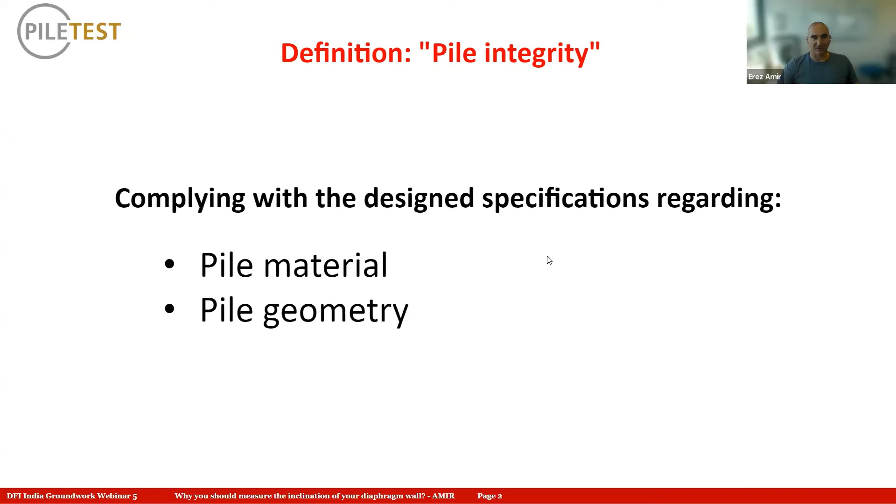Let's start with a broader definition of what pile integrity is. So in general, pile integrity is complying with the design specification regarding two things. One is the pile material, the other is the pile geometry. And if this sounds vague, I have examples for both. So when we're talking about material, we're talking about reduced concrete quality. It can be a void or a soil inclusion, mixed soil or slurry with concrete, or anything that reduces the concrete quality, as well as segregation, honeycombing, etc.

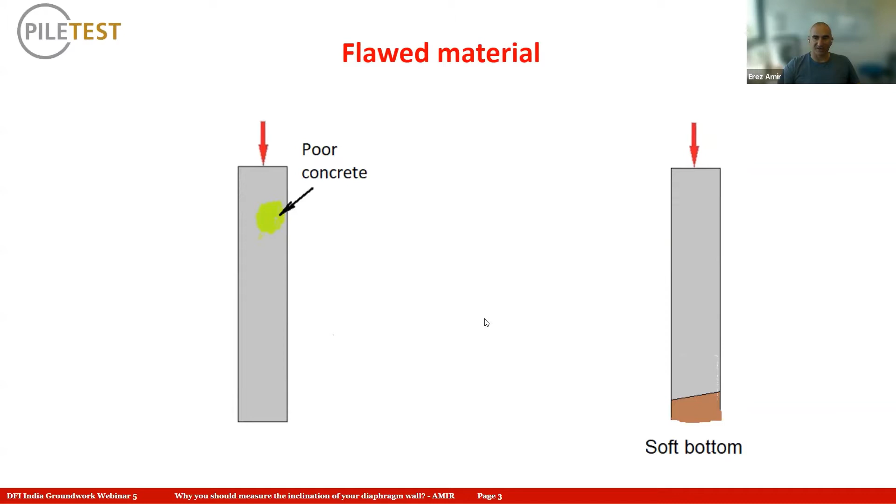Another example for that is a soft bottom, especially important when we talk about end-bearing piles. In this case, when you have a loose material in the bottom, of course, when the pile was not clean or a collapse happened just before pouring, that's a soft bottom and a flawed material at the bottom, which affects the design specification.

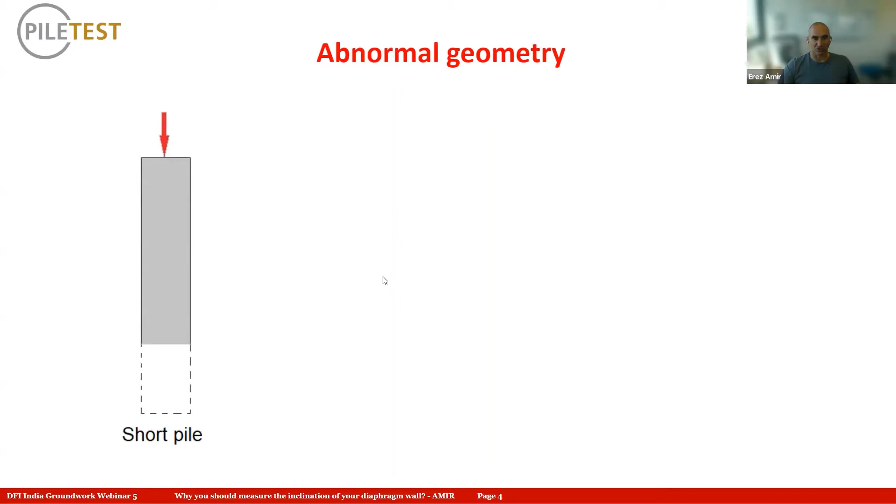An example for abnormal geometry is, of course, the most common and the first thing that you think about when you talk about pile integrity: a shorter pile. Another example is necking, and one that is not displayed is, of course, the opposite of that, bulging. Bulging can also be a severe problem when you have negative friction, which we're not going to get into right now. But necking is definitely a very common issue with piles.

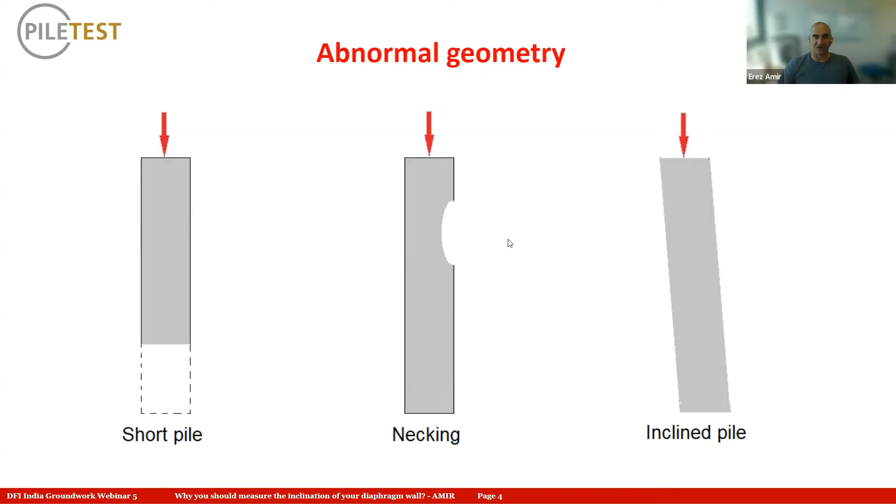And now we reach the subject of our presentation, which is inclined piles. Now, inclined piles are not intuitively considered a pile integrity issue, but let me show you in this presentation how much this perception is wrong. But first, let's start with some examples.

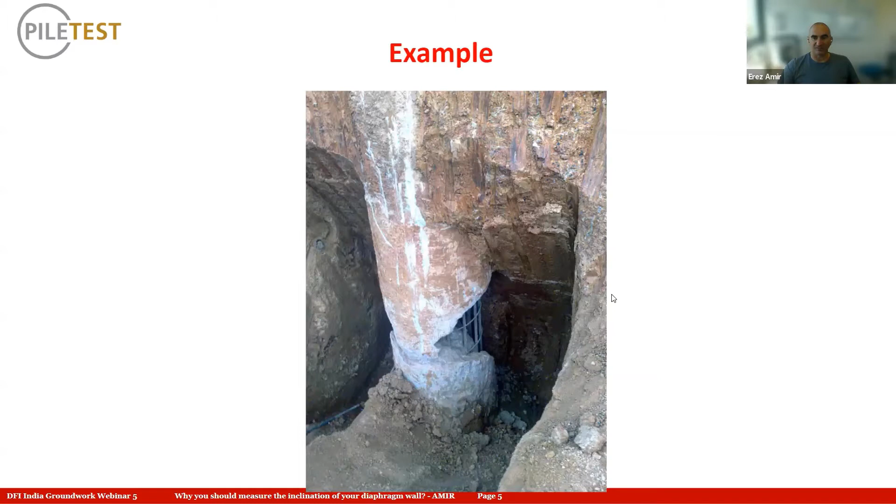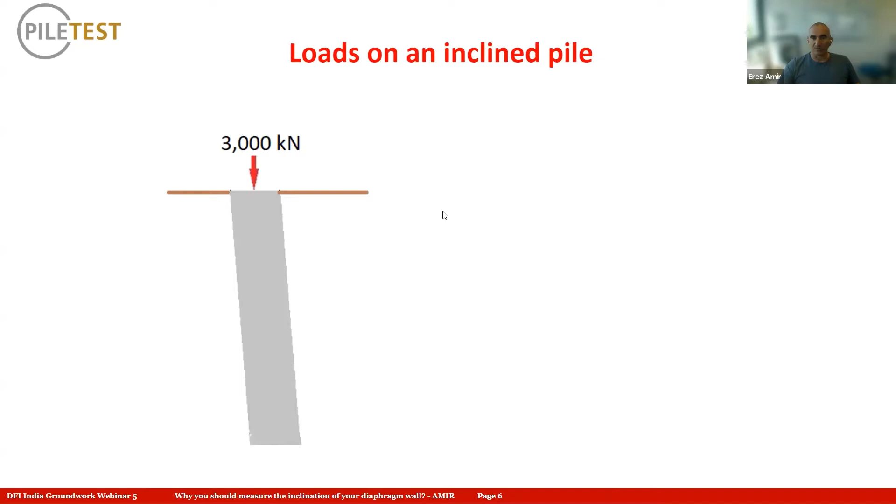Let's get to the subject of inclined piles. So we've run a finite element simulation on an inclined pile with a 3,000 kilonewton load. And we see here the load distribution, the bending moment distribution. And we can see that the top of the pile gets very high bending moments.

Very often this can be much more than what the concrete is designed for. And this is unexpected. I mean, this is never planned for. The design of the pile does not take that into consideration. All the design is being done on a totally vertical pile, and this kind of inclination can introduce totally unexpected forces and, of course, potential problems to the pile.

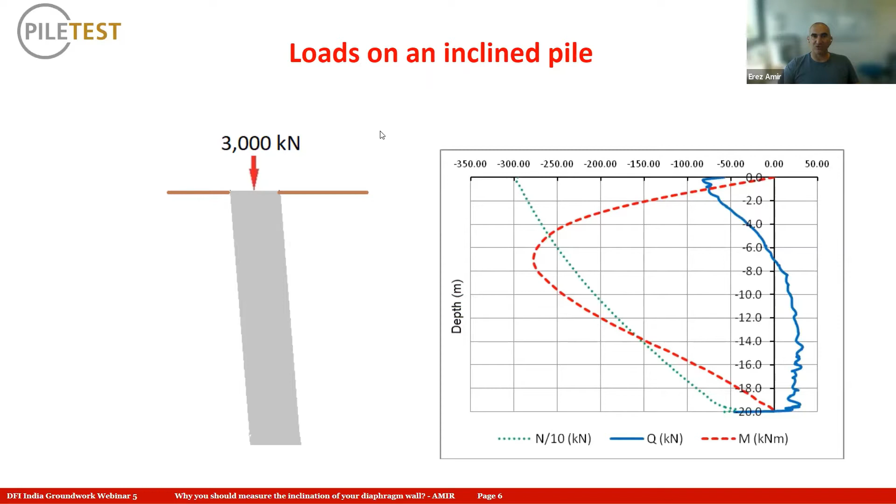So that's really one aspect of why inclination can cause severe, sometimes catastrophic issues in the pile, and it's definitely something that we should consider in our design. The other issue with inclined foundations, not just piles, but walls, is the design of the underground parking garage, which is very often the case in many buildings.

Now, there is a standard number of parkings that has to be offered in a specific building per size. It depends from place to place, but usually the design is not very generous on the parking. And if a specific number of parking slots is required, there will be very little or no spare parking spots available. Now, if the walls supporting the building are inclined inside, it is quite possible that some parking spaces will not be available. It can be that bad. Or it can change the parking from a moderate normal car to just a very small car.

This can cause a severe problem in dealing with the authorities regarding the permits of this building, because not all the designed parking spots for which the building got the permits will be available. In addition, it's a loss of sometimes very expensive area to the underground garage, as well as other problems. But that's not all.

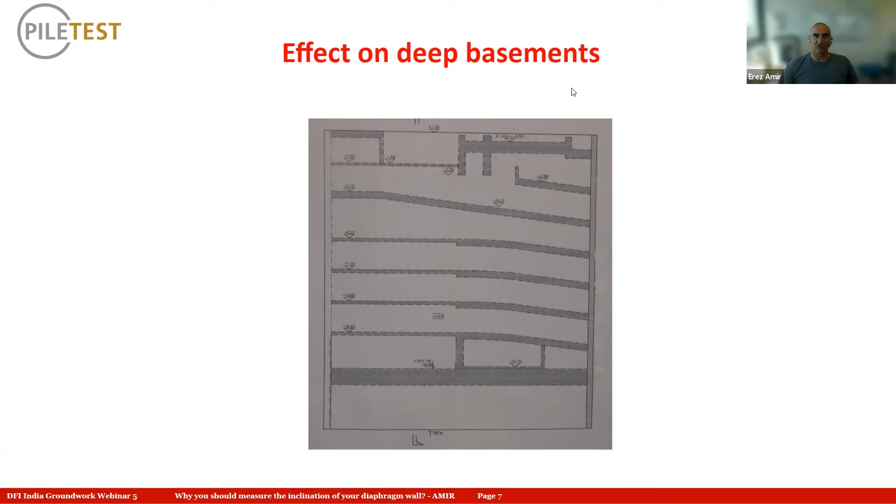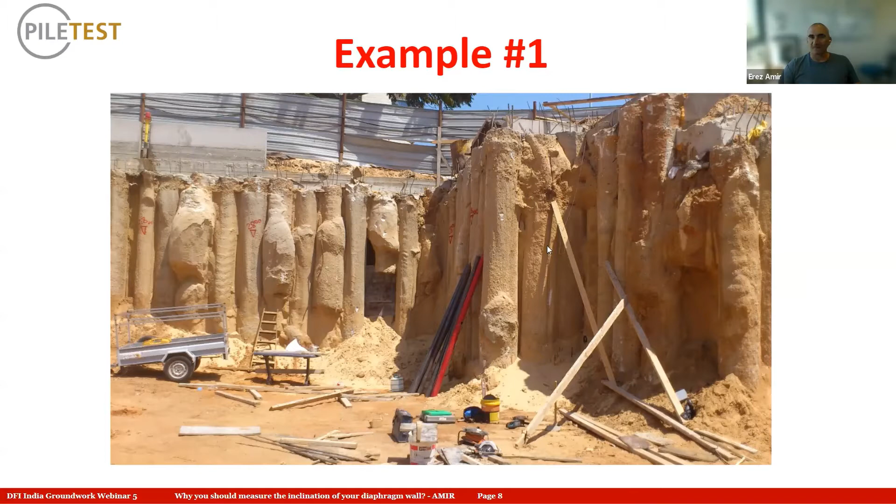Let's see some examples. This is maybe the most extreme problem that I could find with a retaining wall, and you can see that what you see on top is really not what you get when you actually excavate and look at the size of the pile. You can see that in this project, almost all piles are flawed in one way or another. It can be bulging, it can be inclination, it can be the joint between the piles, etc.

And here's another example of an underground garage with barrettes, with load carrying walls. And you can see that here and here and here, if you can follow the cursor, some of the wall panels are really inclined inwards. And this inclination can be quite significant in many cases. So as I told you in previous slides, this inclination can affect the parking spots, but it also has another very severe problem, which is going to be seen next, and this is water tightness.

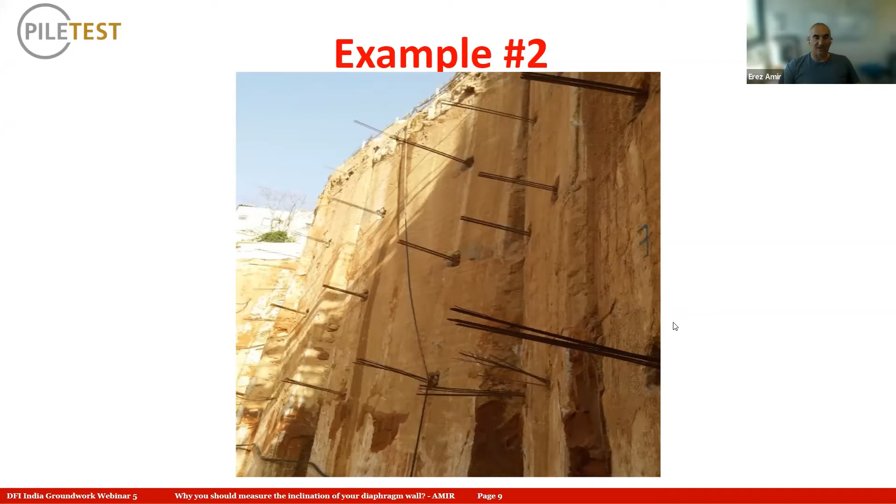More often than not, foundation walls are also protecting the underground garage from the groundwater. And when this groundwater starts seeping or penetrating into the excavation, this can cause a very severe problem, as can be seen in this video right now.

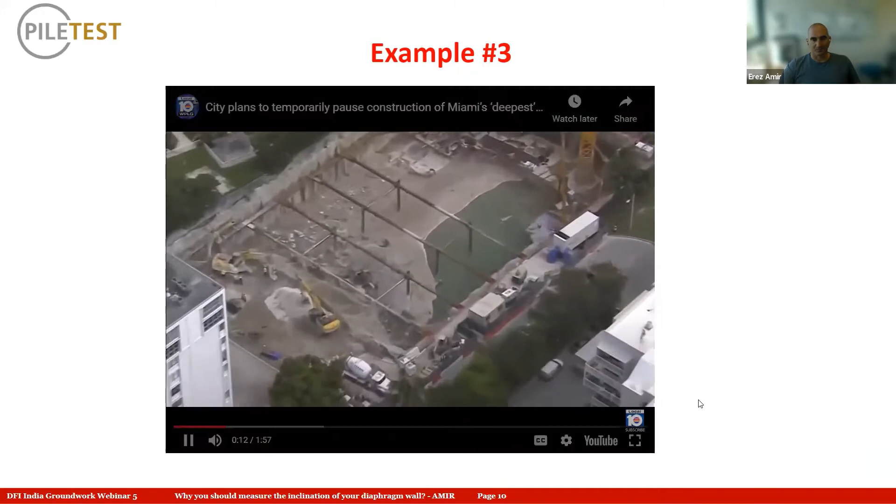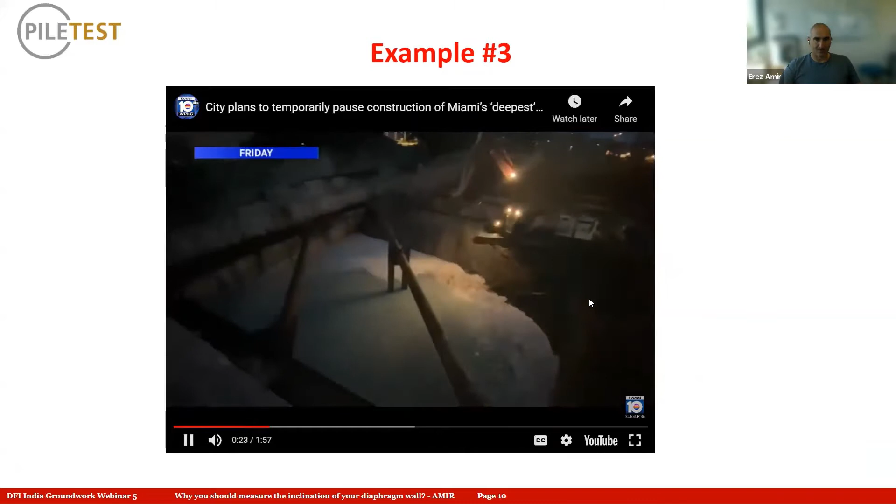A Sky 10 view today over the excavation site for Miami's so-called deepest underground parking garage in Miami's Brickell neighborhood shows a pooling of water in a different area from where water bubbled to the surface on Friday in a second breach. That happened.

So as you can see, this breaching can be a very hard problem to fix. Sometimes it's very hard to stop a breach once it started, and it will only stop once the water level has reached the final groundwater level.

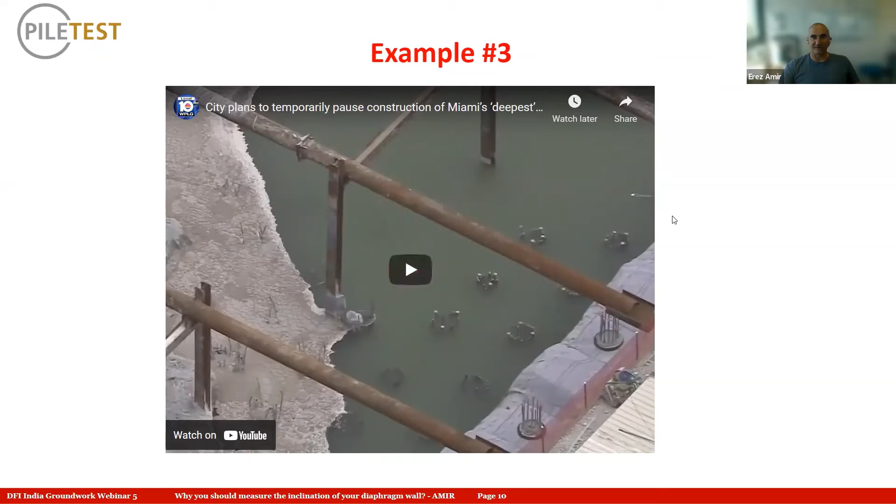In Germany, the archive in Köln, I think, suffered severe damage because of a nearby excavation. The water penetration pulled out the sand from underneath this historical monument and caused very bad damage to the building that could not be repaired later on. And in other cases, this also resulted in loss of life. So water penetration, besides being dangerous, is also very costly and something that we definitely want to avoid.

Okay, I have here geodetic measurements of a contiguous pile wall, where we can look at the offsets of this pile wall, depicted here in the black line versus the red line, which is the design. So this is actually the top of the wall at plus 24 meters. And at this level, there was already a small deviation of 265 millimeters from the plan, from the red line.

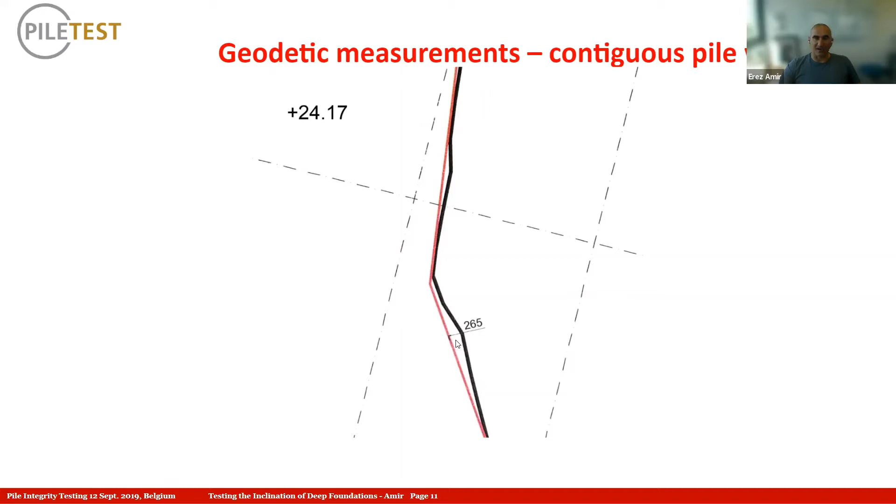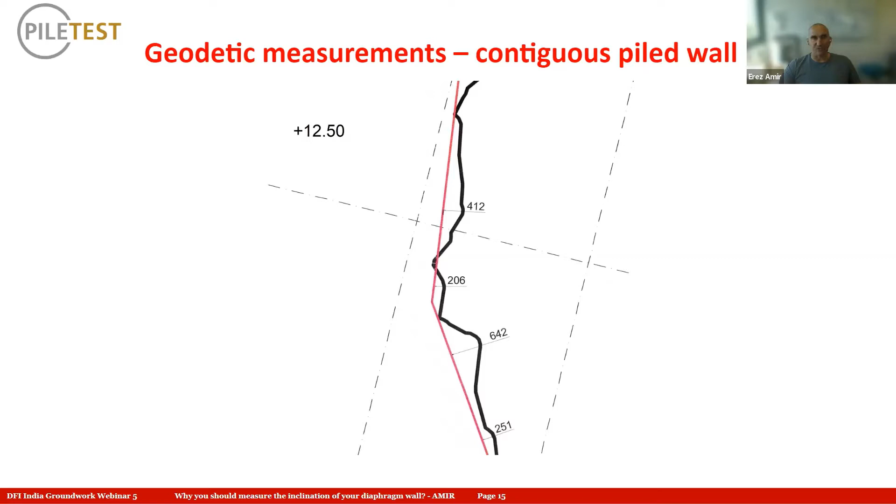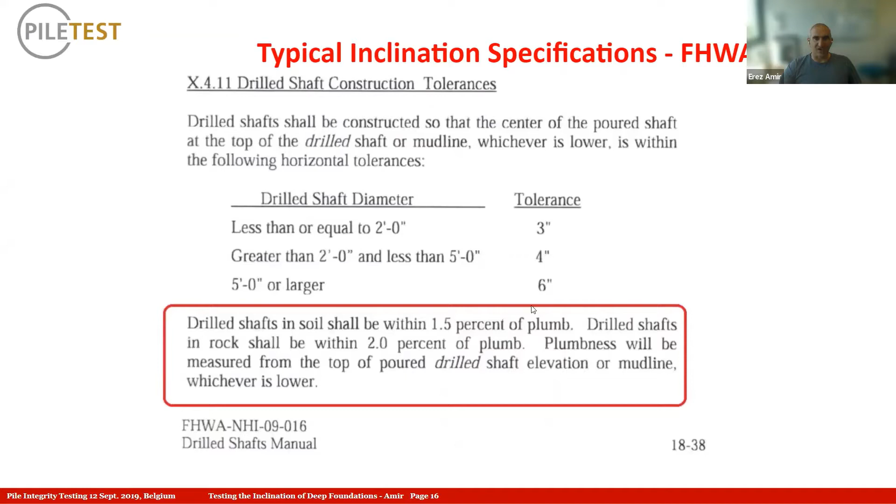So let's first start with the easier case, which is piles. So the Federal Highway Administration requirements, which are also very common to many other countries and places, require 1.5% for piles in soft soils to 2% when the piles are in rock. That's a very typical requirement.

But we will see that this requirement applies to piles. But when we talk about walls of all types, this requirement might not be strong enough. And of course, the standard has taken note of that, and we will get to that in a few slides.

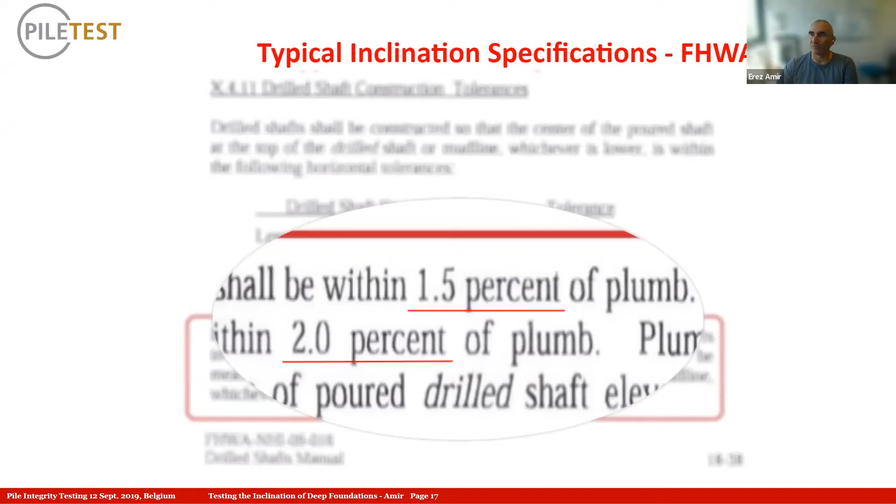When the concrete just starts curing, which means it is not liquid, but it is still relatively soft, but it can stand by itself, the secondary piles number 1, 3, and 5 are drilled through the primary piles. So it takes a little bit of section from the piles, and in theory, this method should give us a very good joint between the primary and secondary piles, and this should ensure water tightness. Of course, the secondary piles are already equipped with either rebars or I-beams or something similar.

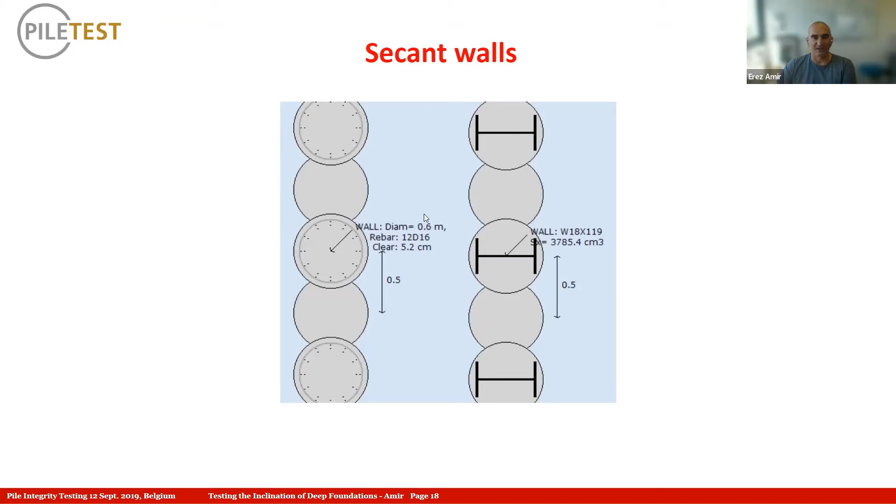But in any way, this method, which looks really nice on the surface top view, can potentially fail miserably if the piles are inclined. If the inclination at the bottom would be just about 1 radius, the water tightness will already not be kept, and water will be able to seep from outside in between the piles. So to ensure that this does not happen, secant piles should be measured. The deviation or inclination of the secant piles of each wall must be measured.

The standard has really taken care of that, and when we talk about walls that should be tight, the allowable tolerance is 1 to 200, or 0.5%. In comparison, for normal piles, it was 1.5 to 2%. This standard, by the way, is a UK standard, a UK code.

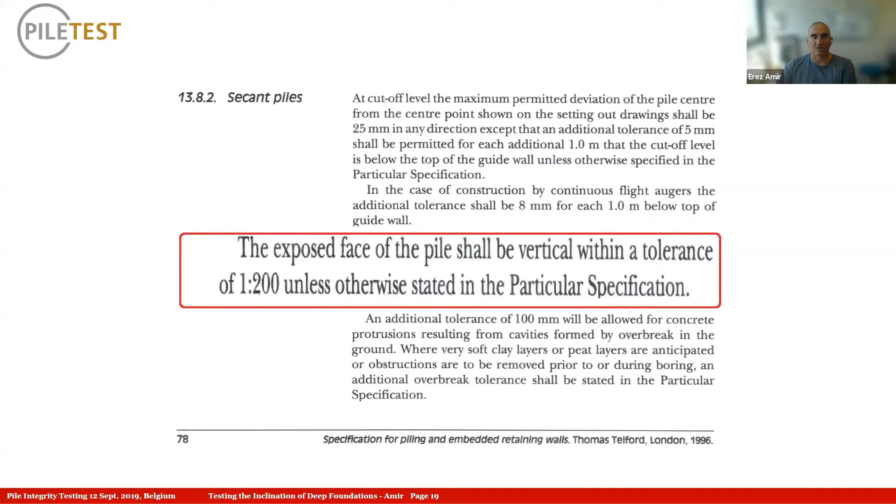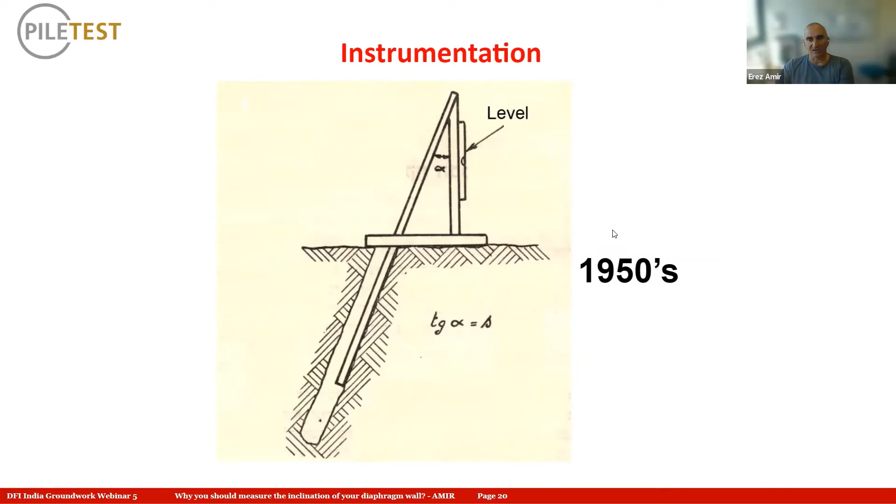So, okay, so how do we measure the inclination? In the old days, inclination was measured by a very simple, very reliable method, just inserting a straight beam into the foundation and using a level either on the beam itself when it's a vertical pile, or using a plumb to measure the inclination and hence the deviation. This was in the 1950s, and we have made a bit of progress ever since.

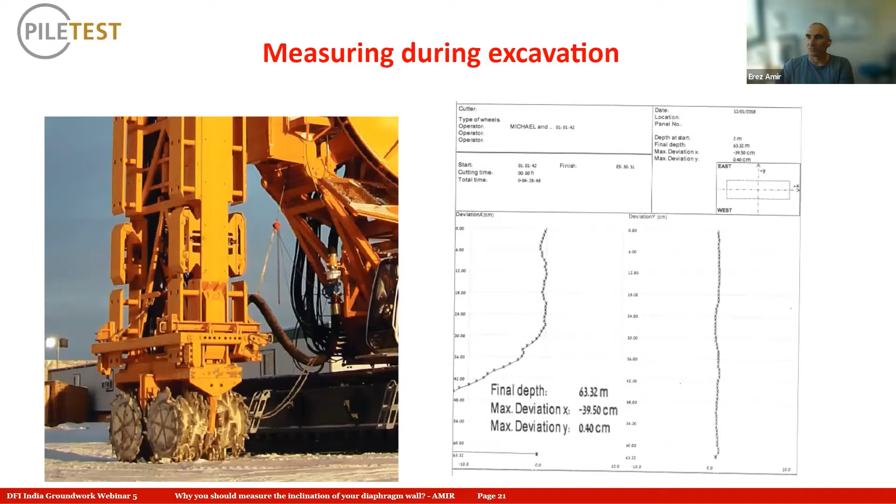The next class of measuring devices are what we call pendulum-based systems. These are systems that measure after the excavation is finished. The first and very well-known system is the Koden system. It is very well known because I think it's the oldest in the market. This system originated from Japan. The principle here is to lower a sensor into the wall, into the shaft, which must be filled with a slurry.

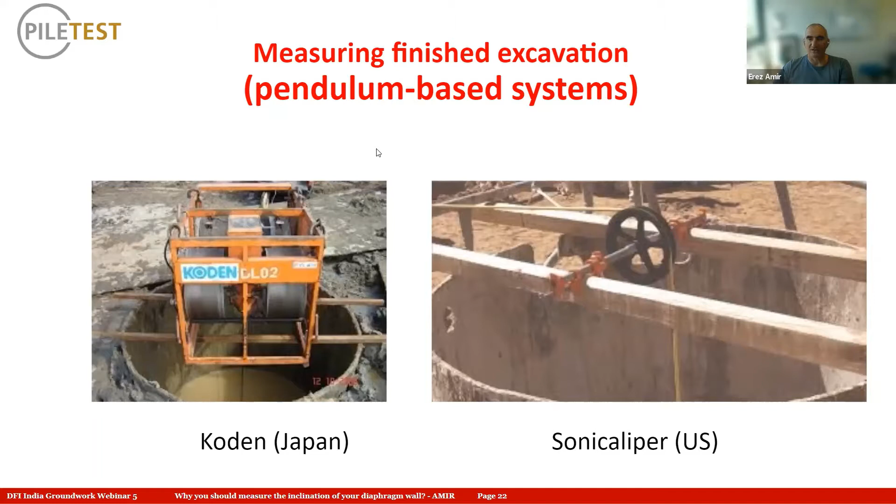The main purpose of these systems is actually not to measure inclination, but to profile the pile, to give some measure of the shaft volume. Contractors are sometimes very much interested in the actual volume of the shaft because they need to order an adequate quantity of concrete. They don't want to order too much, and they definitely don't want to order too little. So these measurements can be a real lifesaver for contractors. As a side product, these measurements also measure the inclination of the pile up to a certain degree.

Let's talk about the pros and the cons of the pendulum-based systems. So the biggest advantage is, of course, that these methods map the excavated profile. So as I told you, you can tell the volume and diameter and shape at any elevation. The drawbacks are that these systems are quite bulky. They require a crane to move around. They are very slow to operate. These methods are also limited just to open boreholes with slurry. You cannot test dry holes, and you cannot test finished piles.

But the biggest drawback is that these methods are limited to inclinations smaller than radius over length, R over L. When the inclination becomes larger than R over L, and this is a totally possible case in very slender piles, then the sensor will just touch the inclined pile wall, and from that point onwards, it just drags downwards on the pile wall and will not measure the inclination anymore, or will not actually give a profile. In addition, these methods are also limited to a certain diameter, after which the distance becomes too large for the sensors to pick up.

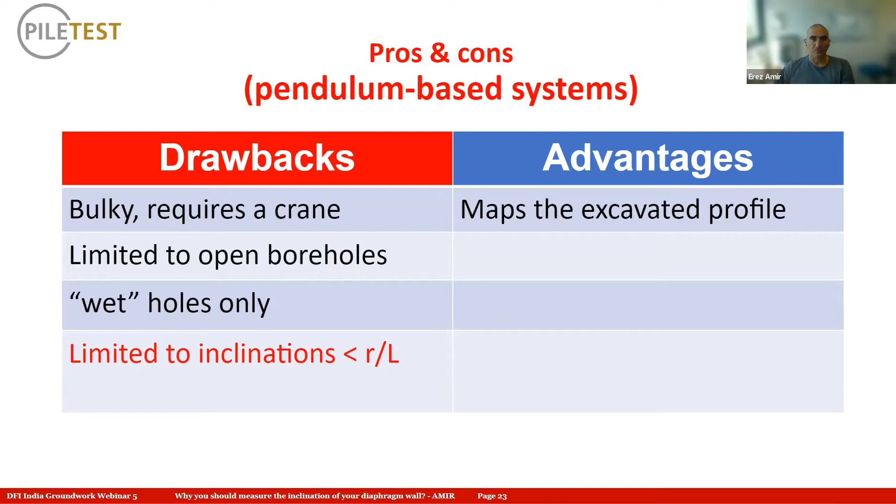We will now talk about the other class of measuring devices.

There's a loss of sound. No, sound is there. It is fine. Yeah. Okay. Can you hear me? Yeah. Mr. Moderator, am I heard well? Yes, it is fine. Okay, so let us continue.

The next class of inclination testing is inclinometer-based systems. And here I'm introducing the BIT, borehole inclination tester. The system is actually a digital inclinometer in a sensor, also equipped with a gyro to compensate rotation. And it can be lowered on a small centralizer, just like very common inclinometers, and that can be inserted into very small diameter tubes.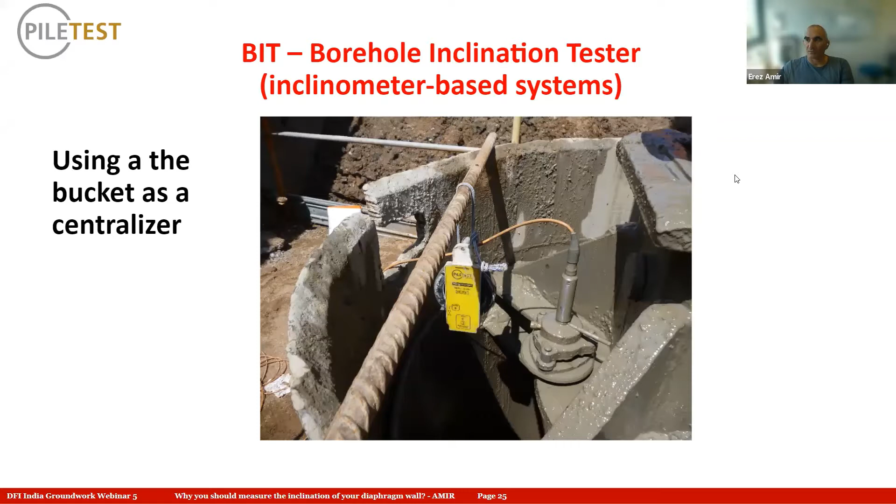So try to imagine the permitted offset as a virtual cone penetrating the ground in, let's say, 2% if this is the standard, and the pile axis should remain inside that permitted cone, and any penetration outside of that cone is considered an integrity issue that should be addressed.

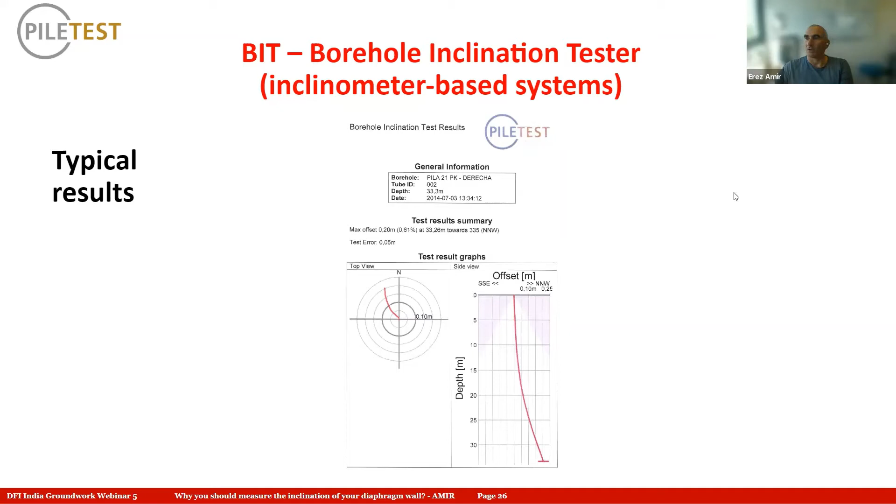Next, I'm going to show you a short video about how testing the wall verticality is actually performed. It's a 3 minute video, all animated, so you can see also what's happening underground, etc.

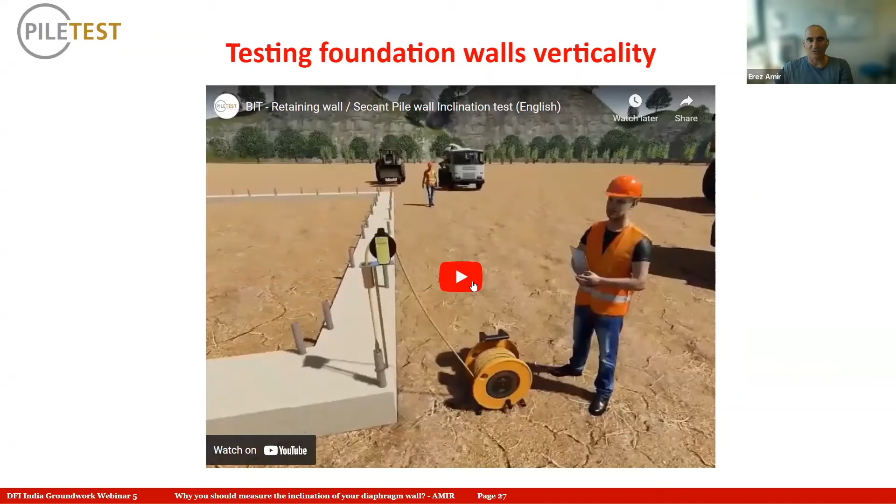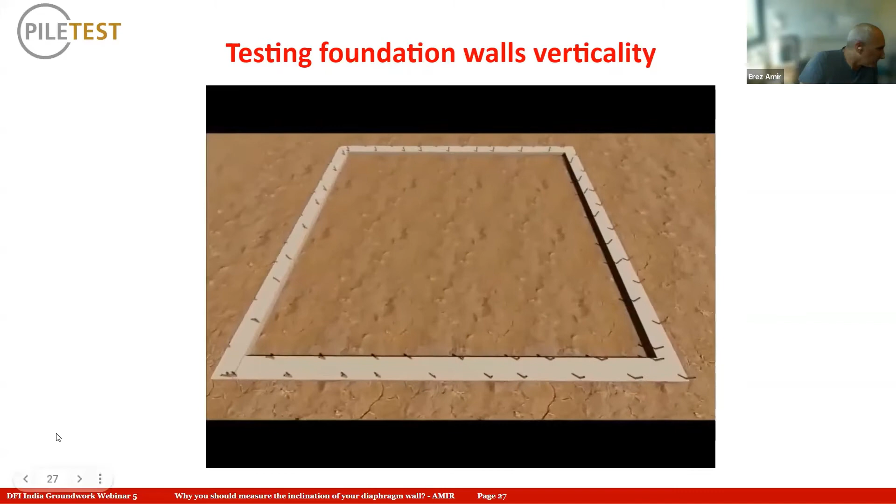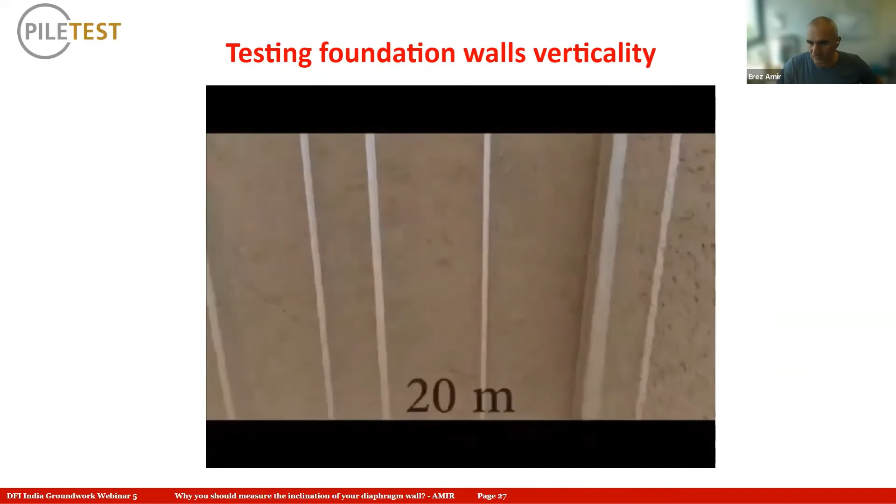The square pit is surrounded by diaphragm walls. The wall elements were cast with access tubes for cross-hole ultrasonic testing. The walls are 30 meters deep. Are they vertical? The BIT sensor and centralizer are lowered into one of the tubes.

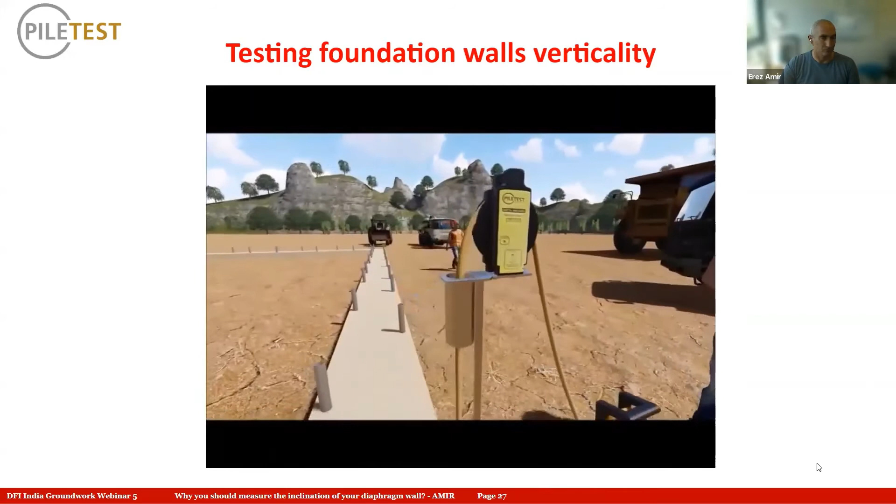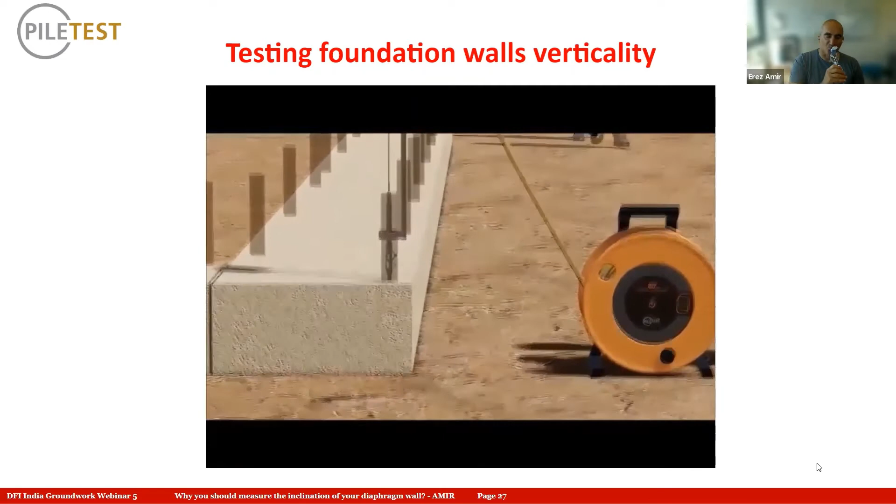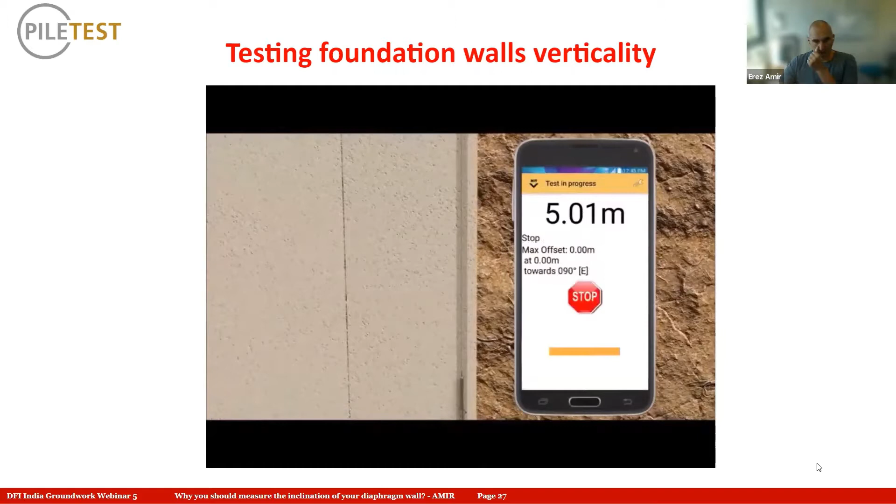The BIT is lowered to the first stop at 5 meters. With the stop sign switched off, the BIT is lowered to the next stop. The procedure is repeated all the way to the bottom. The BIT is now raised, stopping at the same stations.

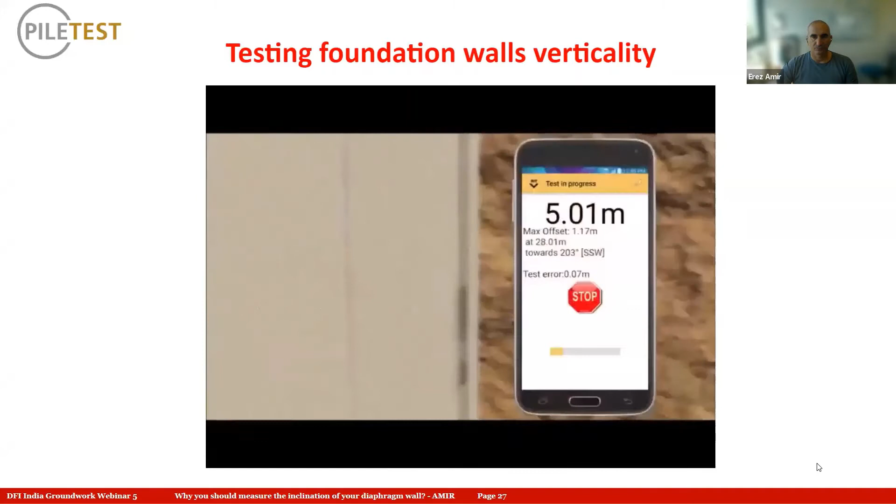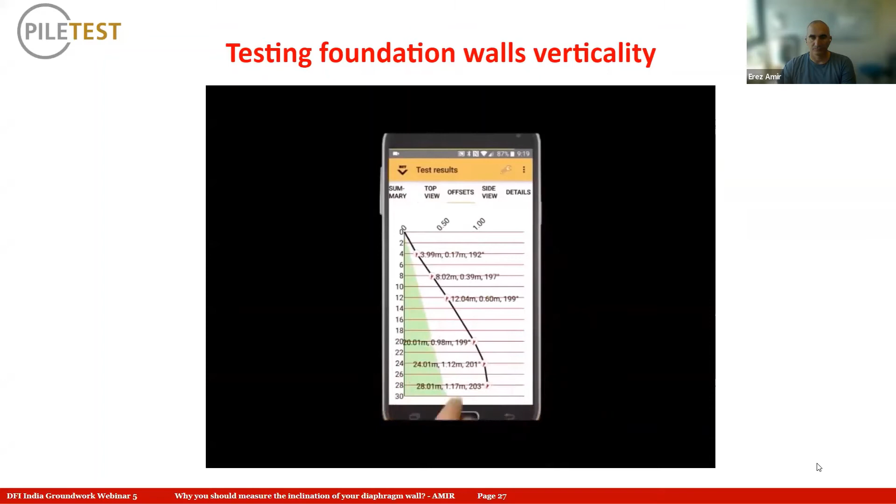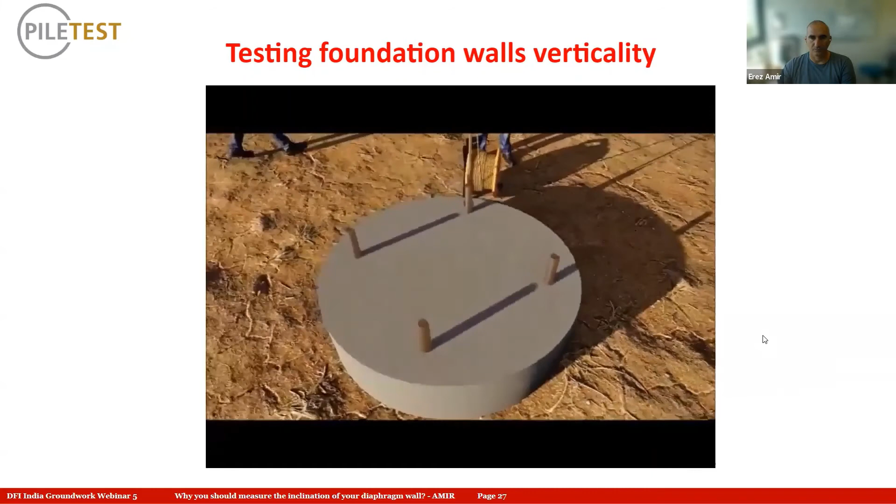The bit is now at the surface for final reading. The top view is now seen on the screen. The side view is plotted on the screen in the desired direction. The deviation of bored piles is measured the same way.

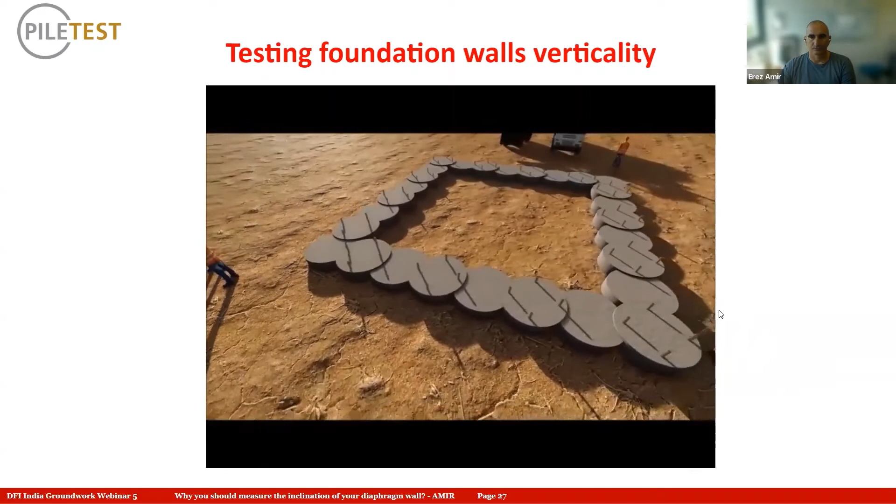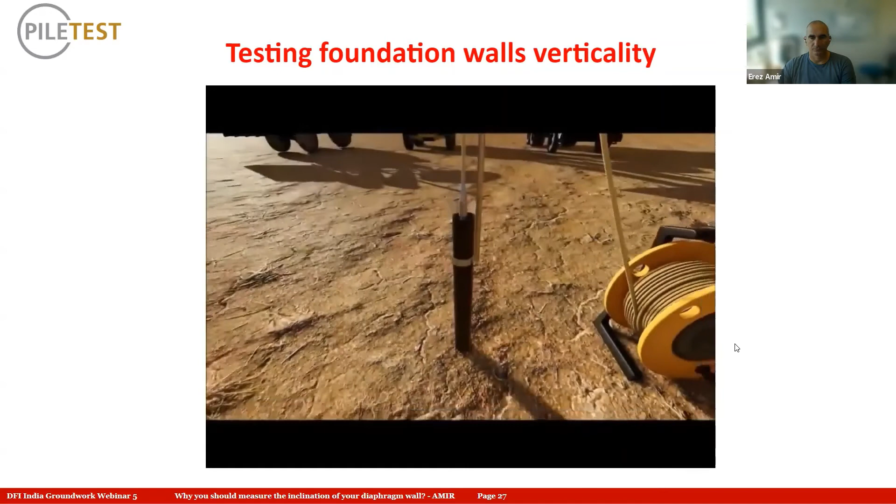The verticality of secant pile walls is of utmost importance. The bit can also test simple low-cost tubes for geophysical testing.

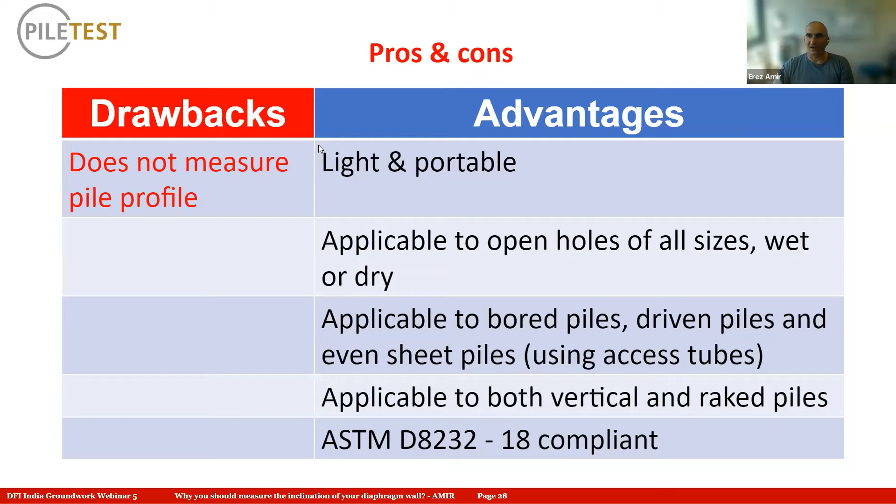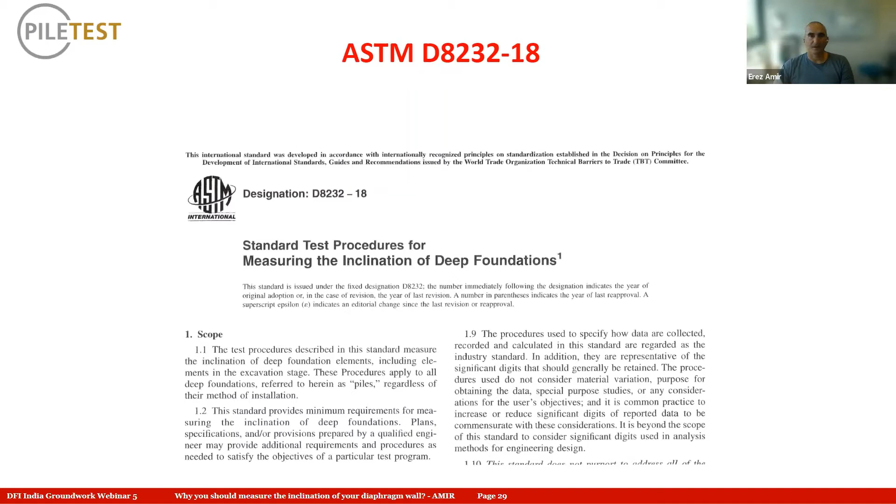I'm going to talk a little bit about how borehole verticality is being measured with the inclinometer-based system. This is important also for secant walls, where you would prefer to measure the verticality of both primary and secondary piles before pouring.

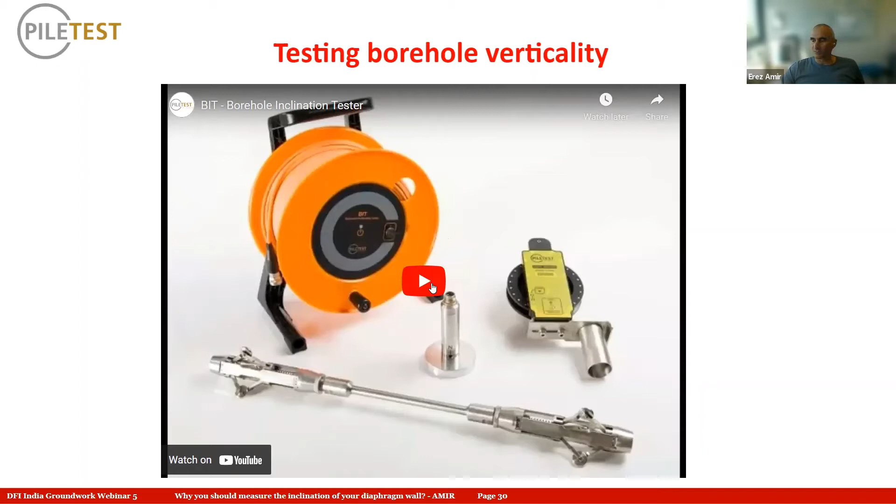So let's go on, this is also about a 3 minute video. BIT, Borehole Inclination Tester - test the inclination of boreholes using the auger bucket as centralizer.

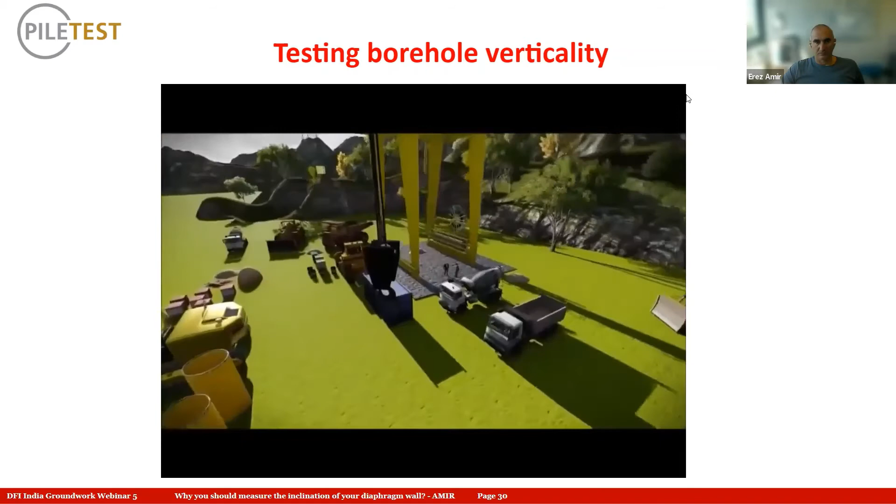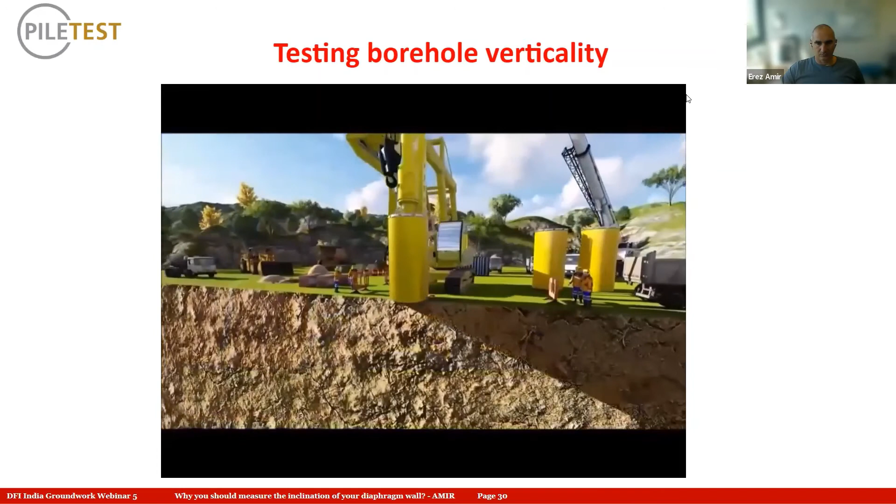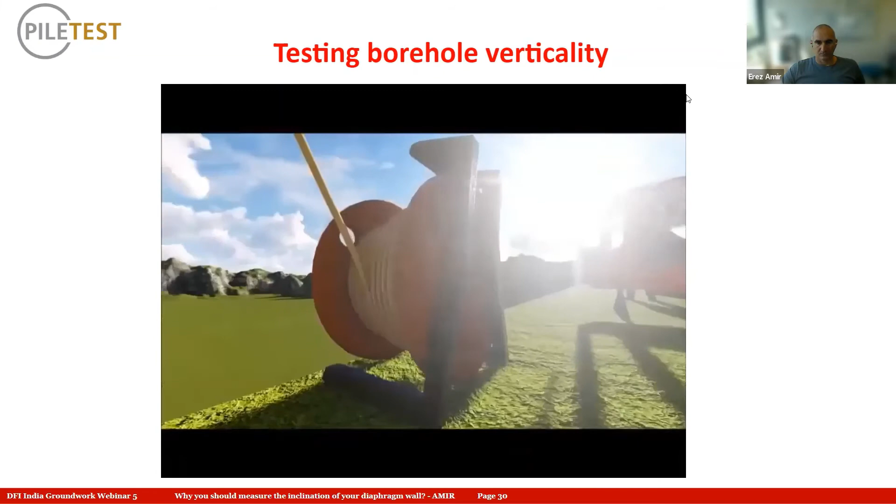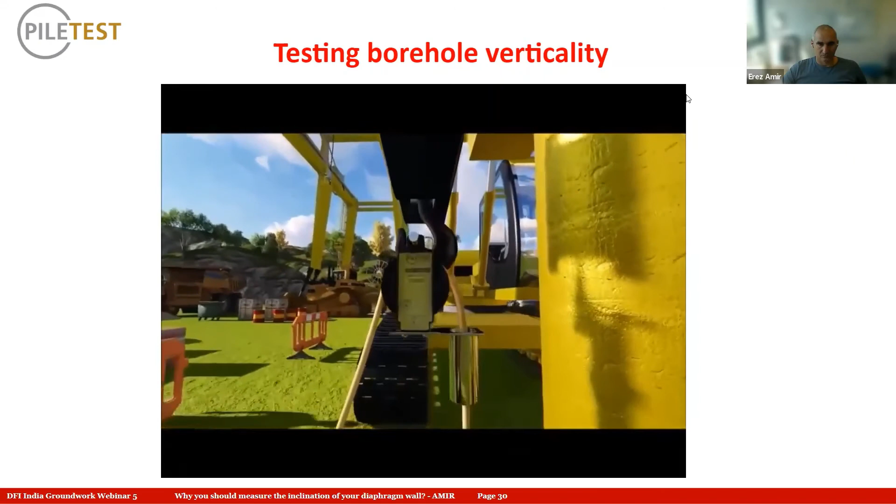The borehole is stable, but is it vertical? This is the BIT, Borehole Inclination Tester. Start by passing the cable around the wireless depth meter. Then mount the BIT probe on the bucket and set it to 0 at ground level.

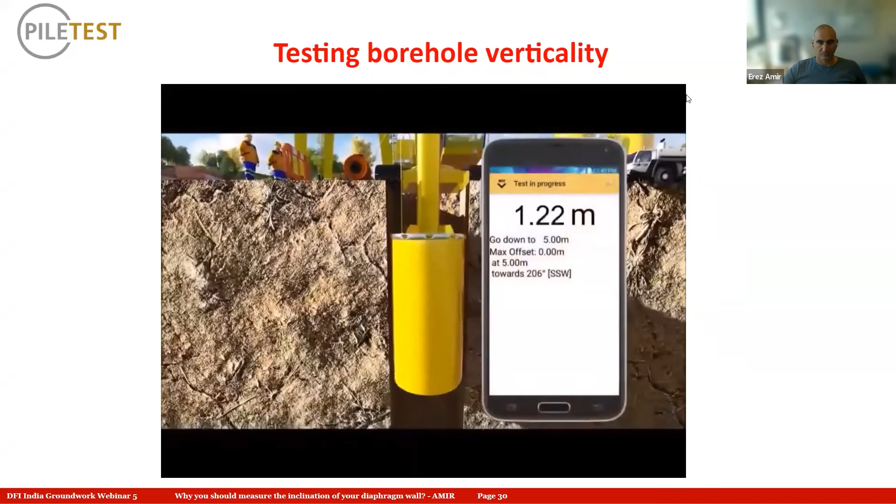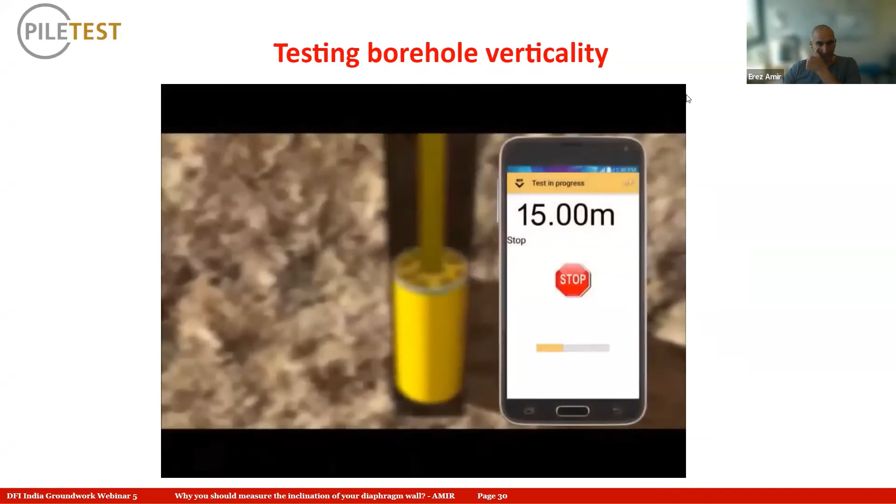After stabilization, lower the bucket to the first measurement stop. The software takes a measurement automatically at each stop. Raise the bucket back to the surface, stopping at the same stops on the way up.

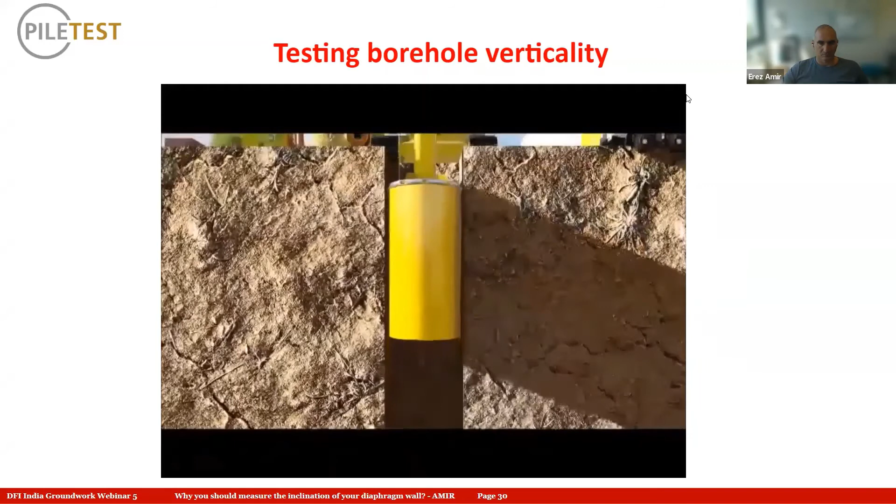Finalize the test to get the overall deviation picture. Top view representation of the whole deviation. Side view representation of the whole deviation.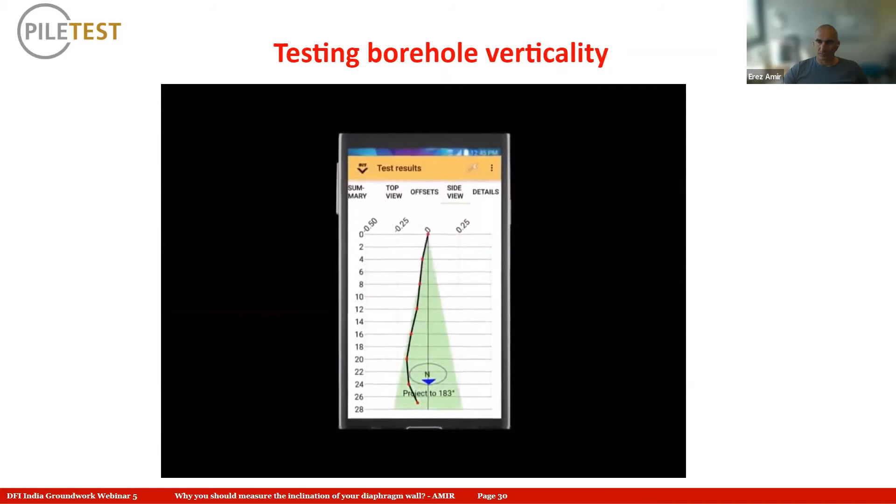Okay, this part of the video is very similar to the previous one, so I'm going to stop it at this point.

The reason I showed you this video is just to show that this method is modular and it can test holes both before pouring and after pouring, using the same access tubes used for cross-hole sonic logging, if this is being done.

So this actually is like a Swiss Army knife, covering all the requirements for inclination in the case of foundation wall elements, either secant walls or barrettes or individual piles of any size, both after pouring or before pouring on open shafts. Thank you very much for watching.